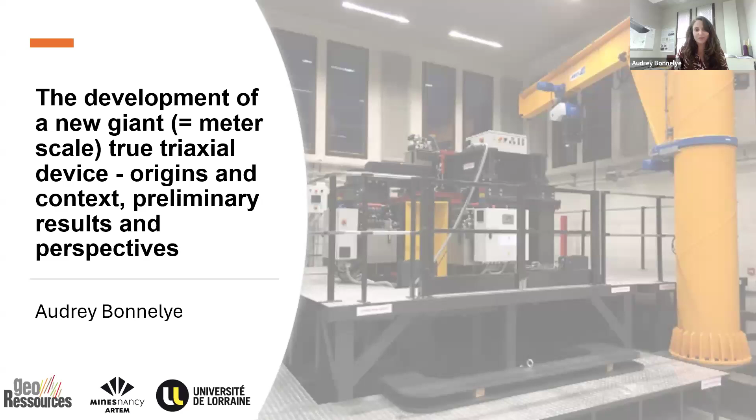So maybe first a little bit of introduction on why it is so important to discuss scale in rock mechanics. I think that rock mechanics is one of the only disciplines in mechanics that requires such a broad range of scales. On my screen, I hope that people can see my mouse on the screen.

We know that rocks are very complex due to their nature, because they are made of an assemblage of different minerals. It's important to understand the link with the microstructure if we want to understand things at a bigger scale.

Those bigger scales can be the scale of underground tunnels, for instance, or even of a fault. I think it's one of the unique disciplines in which we have to go over more than 10 orders of spatial scale, from the micrometer scale up to, let's say, maybe I'm exaggerating a little, but let's say thousands of kilometers.

And I'm solely mentioning the spatial scale and not even touching the topic of time scales. So we have to understand these complex materials with various compositions and structures that can give specific properties to the material, and I think of anisotropy, for instance.

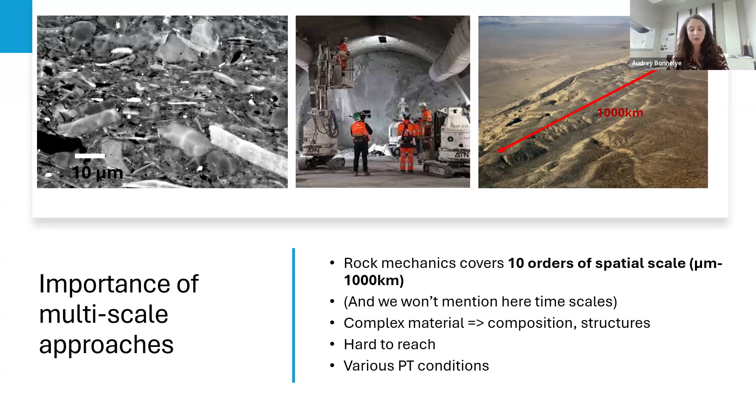I'm definitely not the first one trying to tackle these topics, especially doing experiments. This is a paper by Griggs published in 1940, where he was describing at the time the relevance of doing experiments in order to understand what's going on in terms of deformation inside the Earth.

He was emphasizing some of the parameters that are relevant if you want to understand what's going on below our feet: confining pressure, which relates to the depths at which we are looking at the phenomenon, temperature, time dependence, and also chemistry and potentially shear stress.

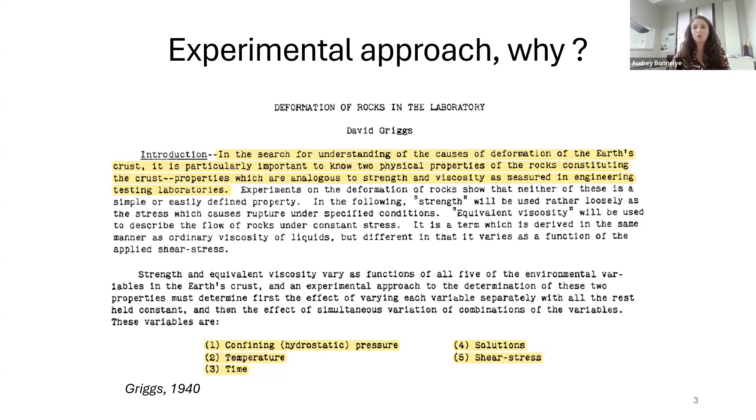So over the past year, I've been developing this work and had the chance to collaborate with many different people. I've been touching many different apparatuses and trying to develop an approach across part of the scale that I've been describing so far.

So from the micromechanical approach, then there is what I will call later on the classic mechanics, with triaxial cells. I will introduce today giant experiments with our new apparatus. And there are also the in-situ scale experiments that are extremely relevant and can be included in the set of different kinds of experiments that we can perform.

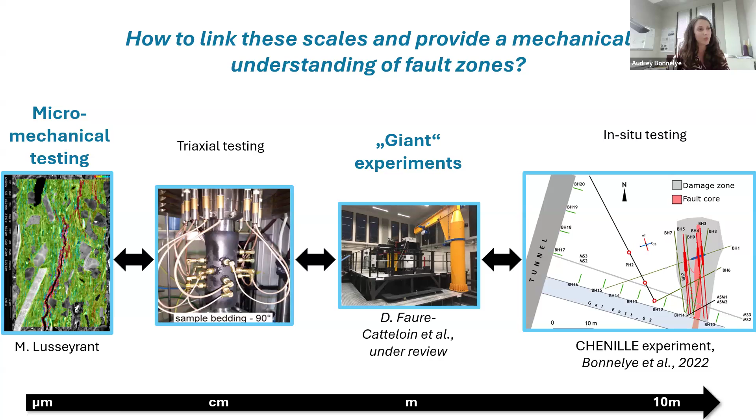So today I'm going to focus on the micromechanical testing. I hope it will convince you that it's important to look at the microstructure and the micro deformations, and I will try to link it together with what I call giant experiments, giving an introduction of the different things that can be done with our new apparatus. So let's go back to the basics of what we do when we perform mechanical experiments in the lab.

The work I'm going to present here is the work of Mathieu Lusseyrant, and you can see his picture on the top corner of the slide. Mathieu is based in École Polytechnique in France, and I'm one of his supervisors.

So what do we do when we deform a rock? Basically, we take a sample that can be of any size, but mostly of centimeter size, and then we apply a deviatoric stress on our sample. We usually measure the deformation, so you can see the evolution of deformation as a function of the applied stress on the sample. We measure axial deformation, usually radial deformation, by putting some strain gauges on our sample, and then we deform it.

Along the experiment, what we can also do is measure the evolution of p-wave velocities. The problem when we do such an experiment is that we are solely considering deformation as a punctual value, because we are usually gluing some strain gauges on the sample. But what we know is that deformation is not a single value on a single point.

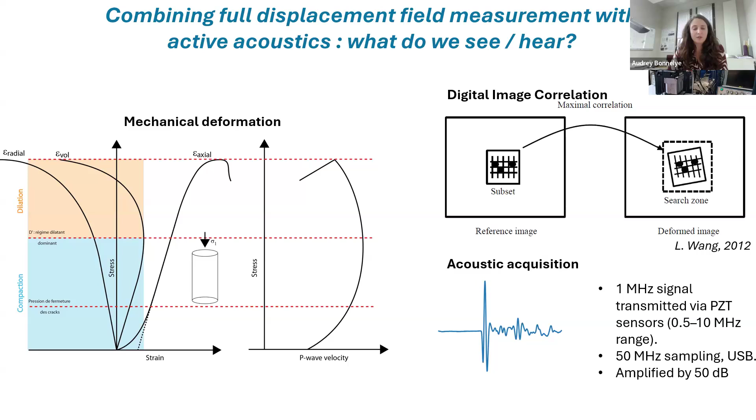So what we do measure: first we are loading a sample. This is a machine, but I will show more slides and more description of the loading apparatus. We are uniaxially loading some sample, and we are doing that directly inside of an SEM, which is an environmental SEM. We are measuring the force, the displacement, and the full displacement field thanks to digital image correlation.

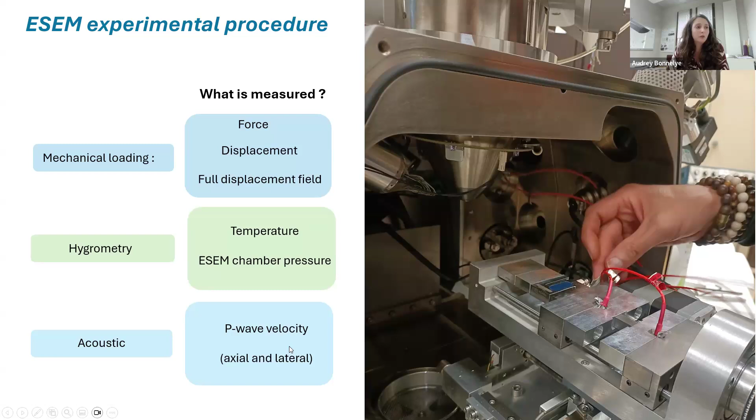We're controlling the temperature and the hygrometry inside of the SEM, and in the meantime, we are measuring the evolution of p-wave velocity, both axially and laterally, with respect to our sample.

So here is how things are looking like. We have a tiny little sample of parallelepipedic shape, 8 by 8 by 16 millimeters, and we are ion beam polishing the surface. We're using an ion beam polishing device because the samples we are using are clay, so we need a very fine polishing if we want to be able to see the very fine microstructure of our sample.

So you can see both a scheme and a picture of the assembly. We are measuring the P wave velocity all along the experiment, both axially and radially to our sample.

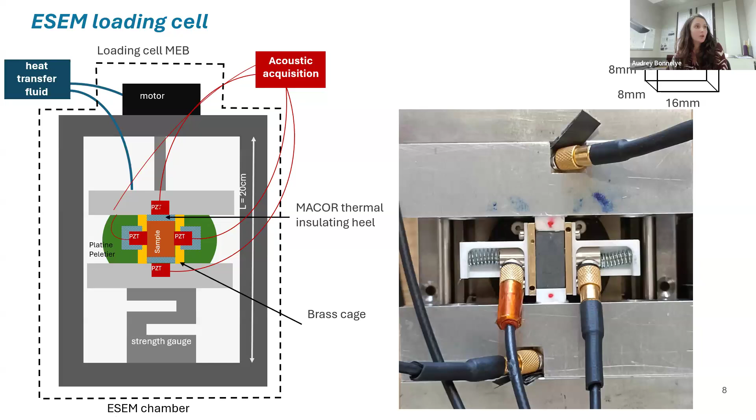So in that case, we are loading a sample with a bedding orientation. The bedding orientation is perpendicular to the loading direction.

So those experiments are extremely time consuming, because of the time that is required to take the picture, and also the time required to reach the appropriate conditions in terms of temperature, so we have the good hygrometry inside of the chamber of the SEM.

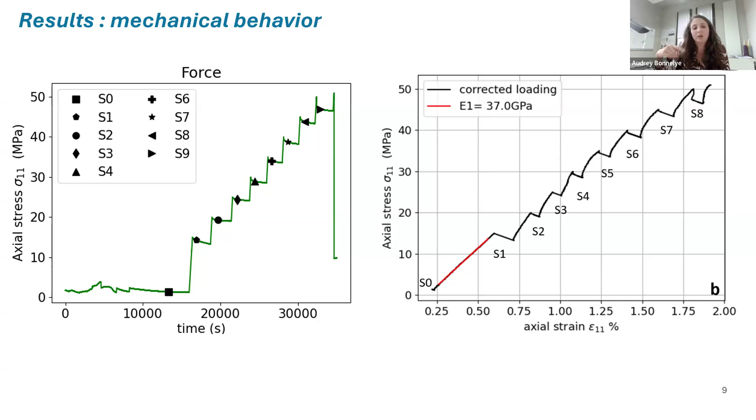Quick question - can you go back one slide? These steps, S1 through S8, are those time-dependent relaxations? How does that happen, with stress going up and then down with strain? Yes, that's because we're stopping the machine, stopping everything, so that we know the stress state when we are taking each image. I see, so it's relaxing - just a pure relaxation. Right, and the boundary condition is constant displacement of your load point? Yeah, exactly, so it's not creep. We stop the displacement, which is why you can see the stress relax.

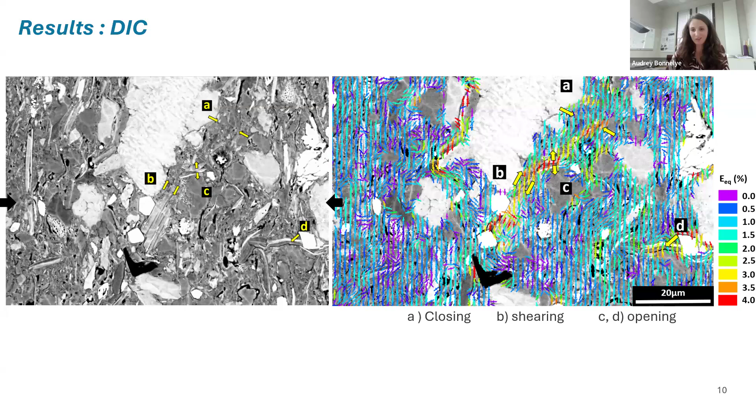Well, doing those experiments is very nice, of course - otherwise we wouldn't be doing it. It's really cool because it gives you an insight into what mechanisms are taking place and where they're taking place. The idea behind that was to try to understand where in the rock they would take place. So we decided to take different subsets in the image in order to see whether there could be some zones with preferential localization of deformation.

So we chose 3 different zones - you can see them here: P1, P2 up there, and P3 here. They were chosen with respect to the composition of the minerals you could see in it - some place with very tiny particles, and some place at the interface between some bigger particles and the clay matrix.

Around those different contours, he calculated the total deformation as a function of stress. The vertical axis is stress, and horizontally you see the evolution of deformation, using rock mechanics convention, where compaction is taken positive and dilation is taken negative. What we see is that apparently the biggest deformation is localized at the interface between the soft matrix and the bigger particles.

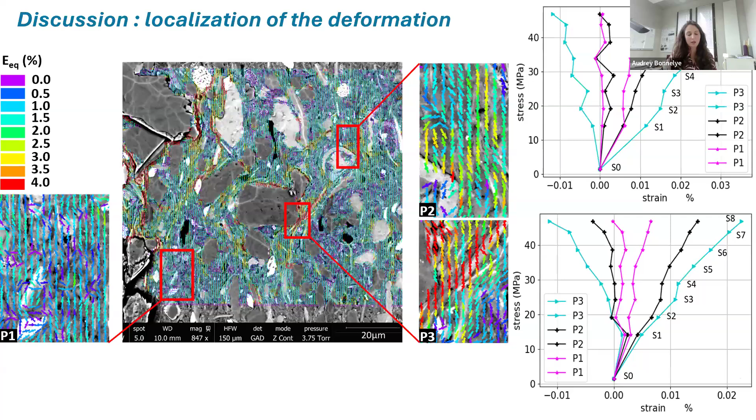During our experiments, as I mentioned earlier, we've also been measuring the evolution of P-wave velocity, which is usually used as a proxy to understand compaction and dilation. Compaction means we are compacting all of the pre-existing porosity, which can be divided into classical porosity and crack porosity. Dilation is usually associated with the generation of damage inside the sample.

Here in black, we can see the evolution of temperature, which is correlated to the relative humidity because we are inside the SEM. In green we see the evolution of axial stress with the relaxation steps, and in blue and red the evolution of velocity. All of that is taken as a function of time, and we can see an evolution of the variations of velocities together with the loading of our sample.

It can seem a little bit weird, but we can discuss that later. What we see is mostly compaction, because there's an increase of the P-wave velocities all along the loading of our sample. But toward the end of the experiment, close to failure, we have a different evolution of the P-wave velocities. During our steps, we see some decrease of velocity linked to damage, but we also observe some recovery that is actually linked to the relaxation steps.

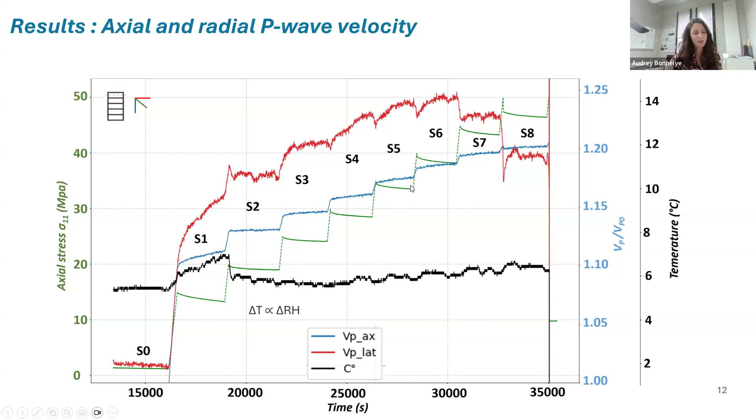We observed this previously while doing some step creeping experiments during Geng's PhD in 2018. The behavior we see is very similar to something that could be done under triaxial conditions, and some evolutions that we have observed previously.

If we correct everything and represent now the velocities as a function of strain, we see classical behavior, meaning we can observe the compaction, and at some point we start to observe the decrease when we leave the linearity of the stress strain curve.

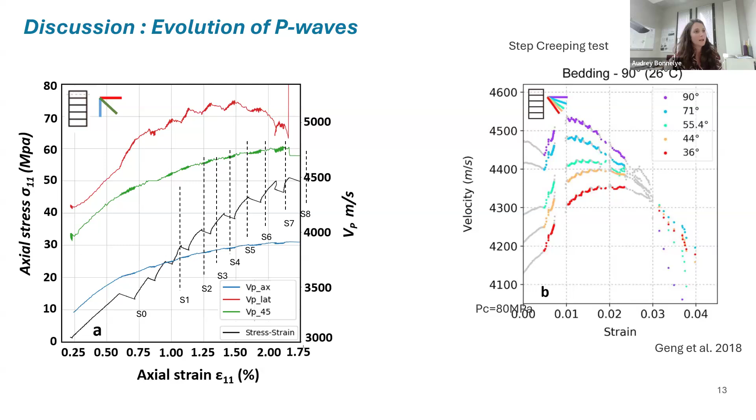This allows us to compare what is happening inside the P-wave velocities with what we've been observing in the different phases of the material. So we do observe the compaction. All of the stress strain curves we've been presenting earlier are going toward compaction, and we see that all of our P-wave velocities are actually increasing.

But then when we enter phase 2 of the deformation, when we start initiating the damage, which is equivalent to the C star value, we start to see a different evolution of the P-wave up to the moment when we decrease, which is reached prior to failure.

So far there is nothing brand new, in the sense that we're putting together some pictures showing the full field together with the evolution of P-wave, but we're not very far away from trying to have a quantitative approach that will link the variation of P-wave with a quantitative way to discriminate all the different mechanisms of deformation taking place.

We hope to be able to link a percentage of increase in P-wave velocity with a percentage of compaction, and most of all, a percentage of damage that is generated, in order to understand when we will reach the critical point where the deformation is going to properly localize and be ready to make the sample fail.

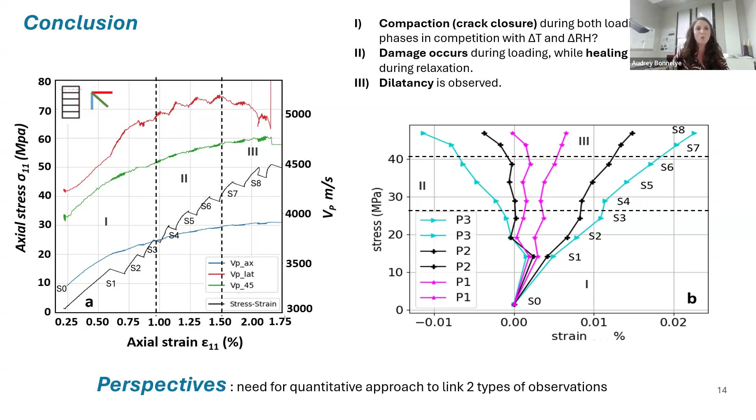Let me introduce you to our new machine. The name of the machine is Dimitri, and the acronym is actually very French, which means Device for triaxial analogic modelization.

Since 2 years now, I moved into a department of geosciences and civil engineering, and my colleagues, who come more from the civil engineering community, have been developing that device. I teach at the School of Mines, and the machine was initially created to make physical models of underground mines.

You can see on the picture the big yellow thing is the crane we need to use to carry all the pieces of the machine. On top of that, you can see the whole machine, where there are 3 different sides that move in order to generate a true triaxial stress state. I'm going to describe it in more detail a bit later.

Experimentally, there are many different ways to do experiments. To simplify things, let's say there are 2 different ways. One can be physical modeling, which is broadly used in civil engineering. The goal of physical modeling is to make tiny little models, not that tiny, in which you truly mimic reality, meaning you need to scale all the parameters, and so you need to use analog materials in order to do your experiments.

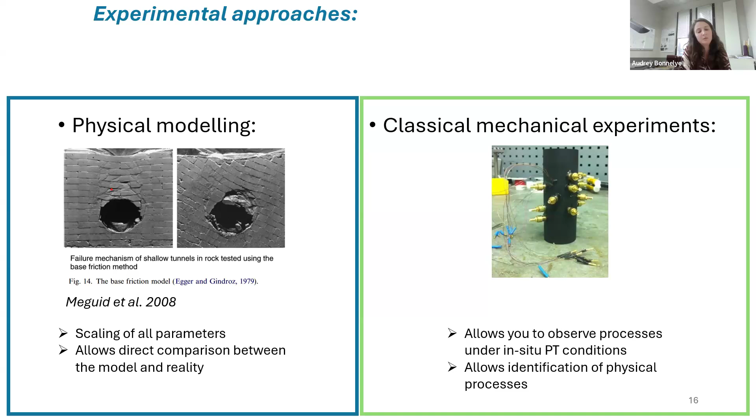The philosophy behind that is to reproduce in situ conditions and to identify some physical processes that are responsible for deformation and rupture. In my presentation, I'm going to present two examples of experiments that we've been performing in Dimitri, following those two different philosophies.

So this is another picture of our machine. I told you it was a true triax because in our case we can apply a sigma 1 different from sigma 2 and different from sigma 3. Here you have one of the moving sides, at the back the second moving side, and on the right of the picture the top side that we need to put on top of the vessel to apply the last component of the stress.

As I mentioned earlier, this machine was designed to look at the mechanical behavior of underground structures. So we also have two excavation windows on the fixed sides of our vessel. Basically, the machine was designed to put something under stress and then drill inside of that block. The size of the block is 1.5 by 1.5 by 1 meter.

We can discuss the possibilities of the machine. Here you can see a scheme of the block that we can put inside the vessel, and here are the windows made for excavation. We can put blocks that are up to, as mentioned, 1.5 by 1.5 by 1 meter. We can reach a maximum displacement on each side of 10 centimeters and a maximum stress on each entire surface of 1.5 MPa.

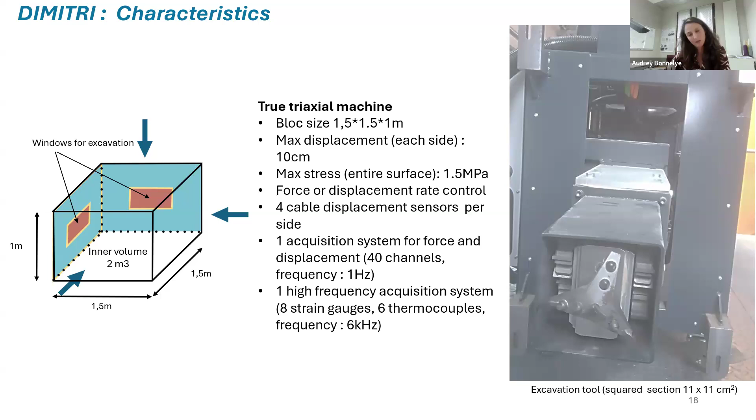I will first show you a video of the printing process of 3D printed sand, and then I will show you the possibilities that it gives.

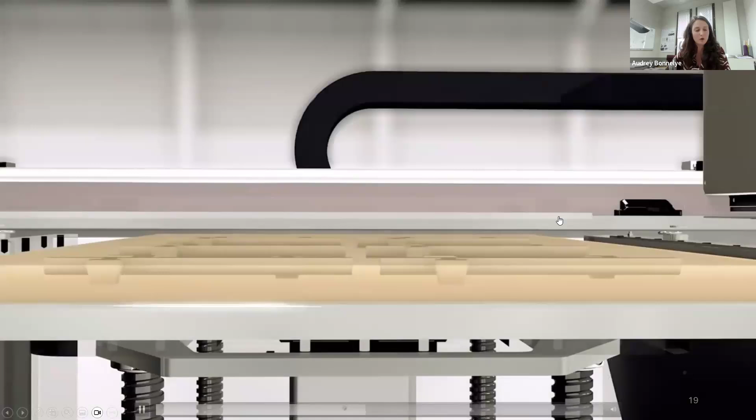3D printing technology is very useful because you can impose the geometry that you like on your sample. In this case, it's 3D printed sand. We put some layers of sand and some layers of glue in order to link the whole process. This process was initially made for industry, for the metallurgy industry, in order to make giant shapes for the metallurgic industry.

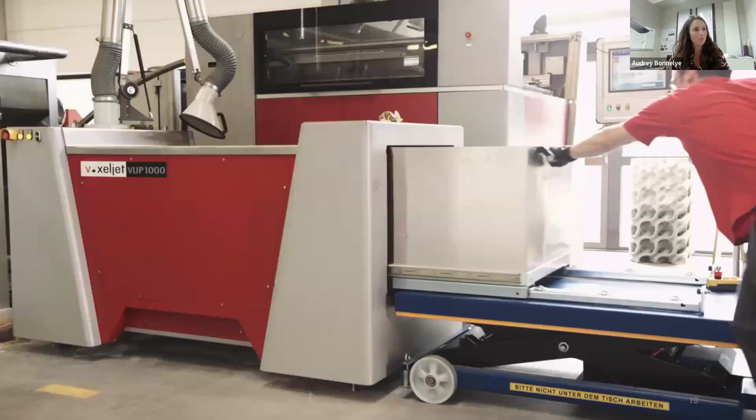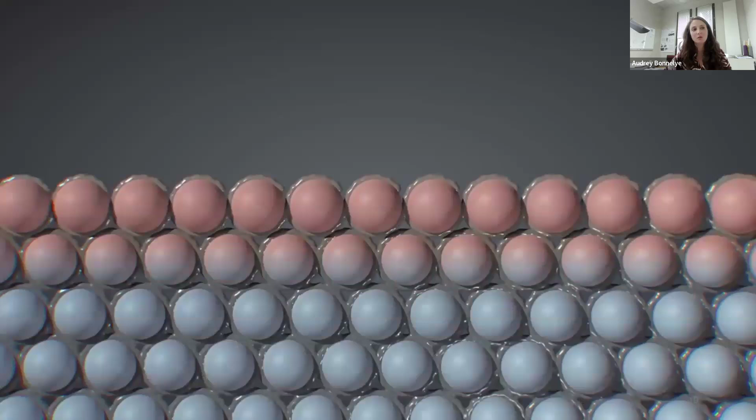This specific process has many advantages - it's really nice because you can generate the shape that you like. But we are reaching the limit of the technology in the sense that we want material with very low mechanical properties, so we are putting the lower limit amount of glue inside our samples, so they are extremely weak.

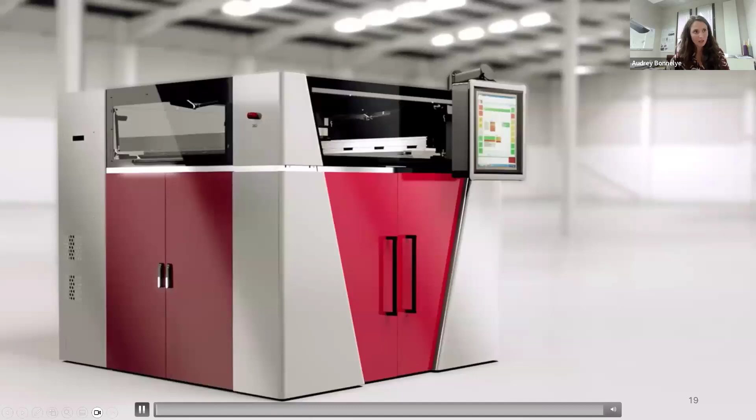Let's take a look at how the material looks. I won't give a full description of the mechanical behavior of that material, but I invite you to see the first tests done by Jaber and collaborators using a more classic 3D printing technique with plastic, and also the PhD work of Emilio Abi Aad, who has been solely focused on developing and understanding the mechanical behavior of this 3D printed sand.

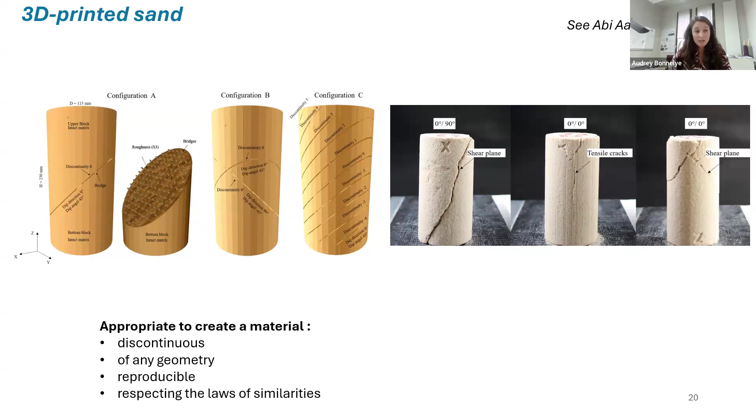So the idea was to 3D print the first blocks. We printed three different blocks, from T1 to T3: one with no discontinuity, one with just one discontinuity, and one crazy one that looks more like a puzzle than anything else. The sample is quite big, a cube of roughly 50 by 50 by 50 centimeters.

The idea is to drill inside of that sample, but first, it's too small to reach the borders of our machine. So we've been putting some dense polystyrene around it to decrease the volume relative to the machine.

We've also been working on how to insert sensors, because when you have a big machine with sensors only outside, you don't really know what's happening inside, and that's what we're interested in. So we've been inserting some force sensors inside of the material to see whether they can measure something. And actually, they do.

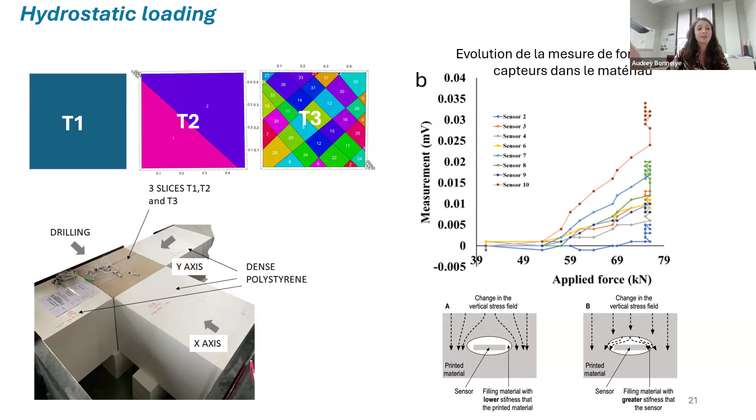All of these curves show the evolution, as a function of applied force, of the measurements inside the sensors. We see that when we load it hydrostatically, our sensors respond. We're not fully sure yet what exactly we're measuring, because there's a very complex interplay between our samples, which are very soft, the sensor itself, and how the sensor is inserted directly inside the material.

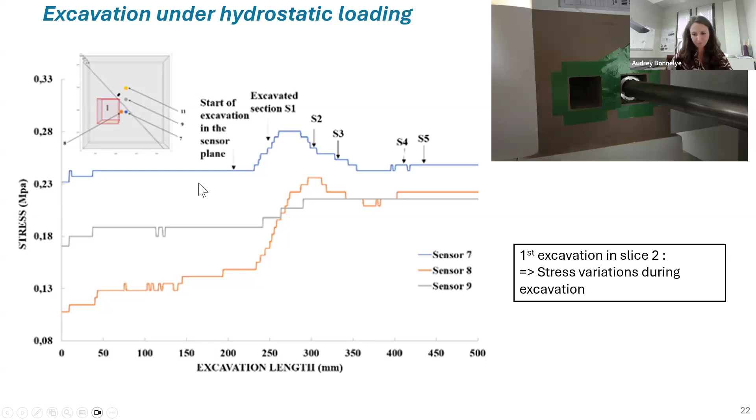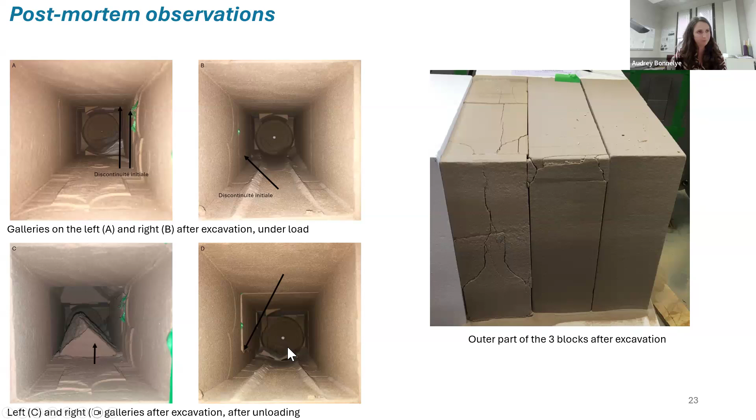I can make some partial conclusions for the moment. I think we can see that 3D printing techniques are very promising to study the mechanical behavior of complex rock masses. We can now print as many discontinuities in the blocks as we wish, and we can reproduce our experiments.

We need better control over material properties—this technology is quite new, so we need better control on it. We also need to do more work on instrumentation, like how to measure force, stress, and deformation, and how to integrate sensors directly inside the material. We can discuss that a bit later. I think it gives us many perspectives.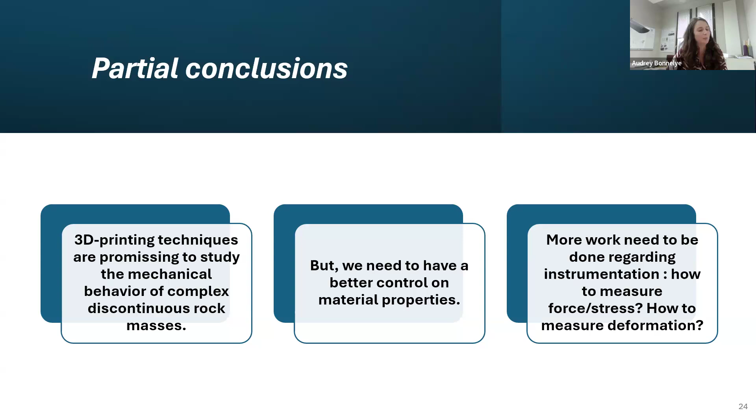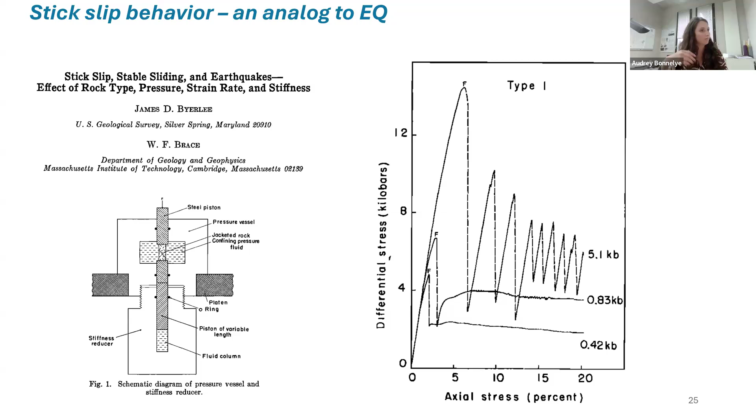The second application, I think many people attending the seminar are very familiar with. It's far from being new, because it's a paper from Byerlee and Brace. Many people have been working on how to characterize the evolution of friction along a discontinuity, making some analogs to earthquake cycles. They've been doing it for the first time in triaxial experiments, where they put a discontinuity inside a sample, then loaded it and checked the influence of all the possible parameters you can imagine - stress state, temperature, material, etc.

So some people, and among those people, of course, Chris, have been developing some shearing apparatus in order to investigate more easily those parameters, in the sense that they have better control. So you have the double shear experiment that is presented here, and people have been doing, again, many experiments toward that direction.

Many people have started looking at what happens if you put bigger blocks, because one of the limitations of the experiments that were done is actually the size of the sample. There are some phenomena that you can only see on a bigger sample. Here's an example of some work done in Japan to look at the sliding surface.

In earth science, I said earlier that analog modeling is more something done in civil engineering, but there are also some attempts at doing analog modeling. I'm putting that example to make an analog version of a subduction zone with specific material. Usually analog experiments are done in sandboxes, but in this case it's a foam experiment that was done in order to reproduce the complexity you can find in subduction zones.

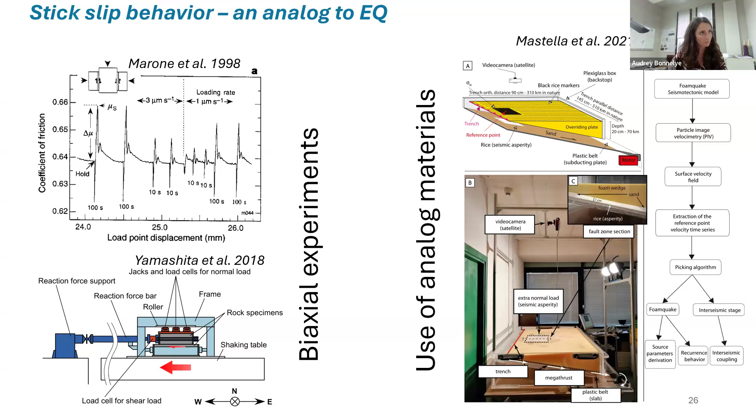Our idea is to try to do something a bit similar in our machine, and we've done some very preliminary tests with the students - I'm using all the students here to help me carry those blocks, which are very heavy.

So we decided to do those experiments on polystyrene - high density polystyrene, with a density of 50 kilograms per cubic meter. It's the highest density polystyrene I could find on the market, and we used very large blocks, this time almost entirely filling the machine.

We made a discontinuity in our material, and we placed some strain gauges along the interface in order to see whether we could measure something. We've been doing some experiments by controlling the horizontal displacement, from one side, just to make one part of the polystyrene go up against the other, and to look at the friction on that interface.

So why polystyrene? Well, first of all, because it's cheap - I wouldn't say really cheap, but it's one cheap way to do it. Also because of the weight - those blocks are huge, and despite the fact that we have a crane to carry everything, in our case the blocks are too big, so it's not that easy to use the crane to put everything inside the vessel. It means we can carry it by hand to put it in the vessel.

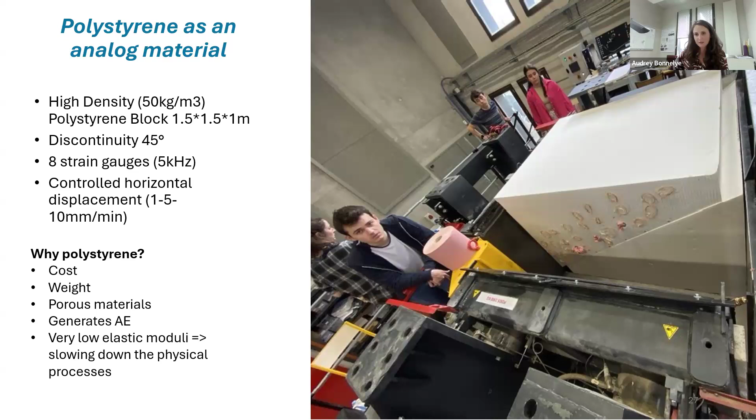Now, just briefly, I will show you some sort of preliminary results - just the raw data set that we have, because everything was performed very recently. On the bottom part, everything is shown as a function of time. We can see that we are controlling the displacement of our sample at the rate of 1 millimeter per minute, and that we can move the whole side roughly the same way on the whole side, so that everything is homogeneous, and that we can apply a constant load on the side we're pushing.

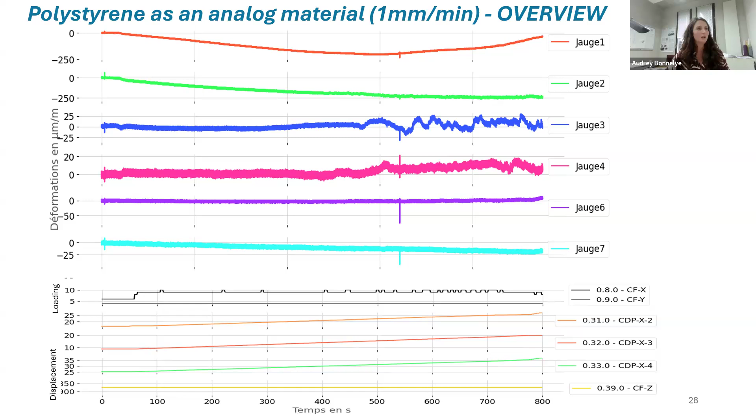And we can see that we can measure something on our strain gauges. Some of the things are looking very weird so far, so we need some further work to interpret it.

But if we zoom in a little bit on the same experiments, the different colors are the different strain gauges, from the bottom one to the top one. We can see that it seems we can observe some sliding of some parts of our experiments. In our case, we simply have one block going on top of the other one, and the only thing applying vertical stress is just the weight of our sample, which means it seems that everything is generating at a specific part of our block.

And we hope that we're going to be able to track different types of signals from one strain gauge to the other. And actually, we see that from that strain gauge to that strain gauge, we could potentially track the evolution of the sliding.

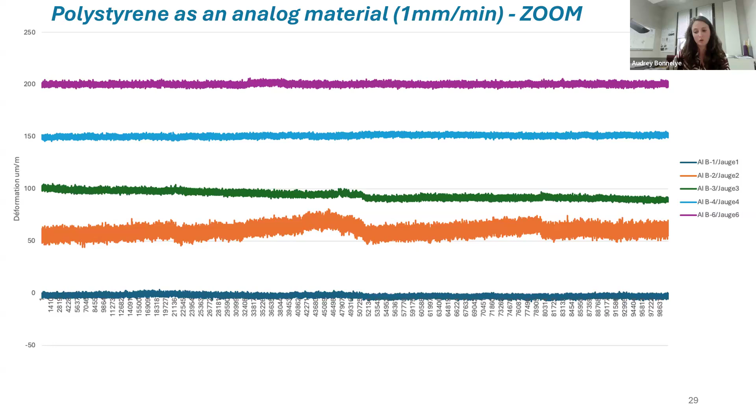And we see that if we try to go faster, 10 millimeters per minute, so 10 times faster, we observe a very different behavior. And actually, we could even hear it, some noise, when we were moving much faster.

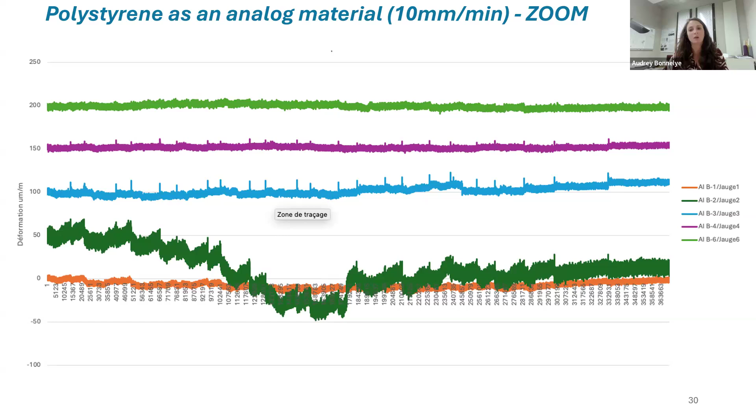So this is leading me to my partial conclusions. I think that polystyrene can be an analog material, and I'm very happy about that because it means we can use it to calibrate our machine and test many parameters. The device is actually suitable for this purpose, and it's good because it was not designed for that.

It means that we can go for more complex geometries than what was done in the past, and look at the influence of stress heterogeneity, for instance, or various stress orientations, because we are under true triaxial conditions.

So more work needs to be done regarding instrumentation. It's the same conclusion as previously: now we need to focus on how to measure force or stress close to zones of interest, and how to measure properly deformation on the whole surface, not just on the side.

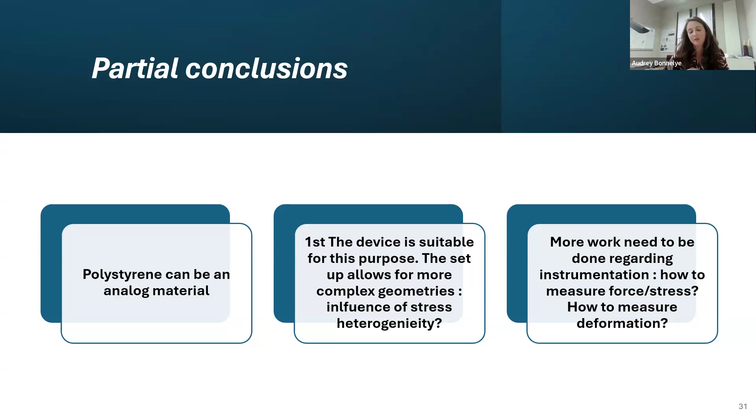And for my very preliminary, more general conclusions, they're roughly the same. I think what is interesting is more the perspective that it gives. First, it will give us very interesting perspectives toward experiments and how to integrate sensors to be as close as possible to deformation, for instance.

But given the size of the machine, we can truly compare with what can be going on in situ. And I'm thinking of comparing things directly with seismology, with a broader range of frequency of sensors or fiber optic measurements that could be directly compared and inserted inside the materials we're using.

And also, we can use the machine in different setups and conditions. What is very nice is that we can go toward 3D stress states, but also, given the setup, we can take a small step back and compare what we do with what other people do.

I've been mentioning the giant machines that are being developed in Japan, or what is done by some groups like the one of McLaskey, for instance, in the US, because they're using 2D stress states, and we can see if we have comparable observations and then insert them into the 3D stress states.

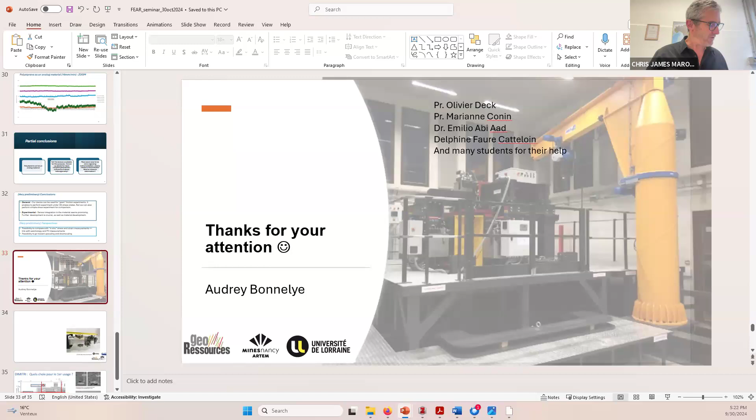While you are thinking about it, I have several questions, and the one that falls toward the end of the talk is on slide 22. Audrey, you showed us - I was confused because I expected to see a circular hole. You're drilling into this, but it produces a square opening?

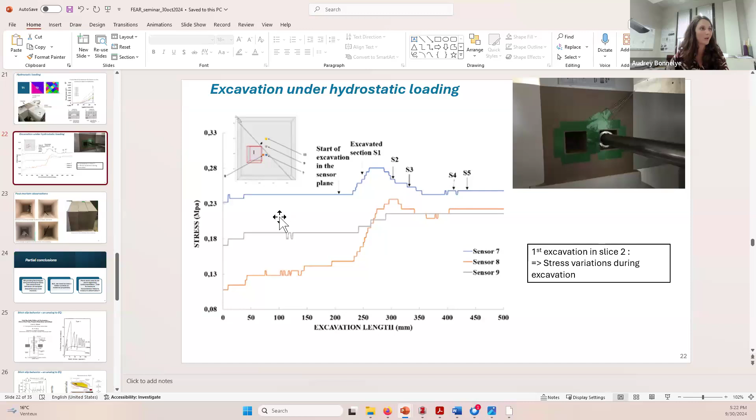Yeah, well, that was the will of my colleagues to have something able to make square holes. So if we go back to the picture of the tool, so it's...